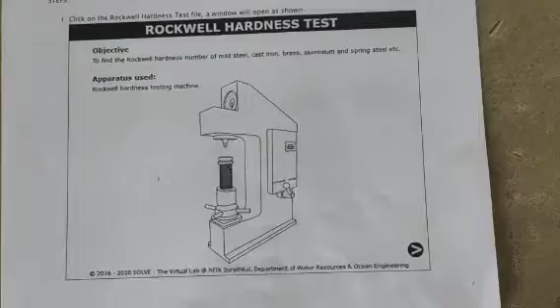Now I am going to start this experiment. This is a Rockwell hardness testing machine. This is called the anvil, and this is the dial gauge.

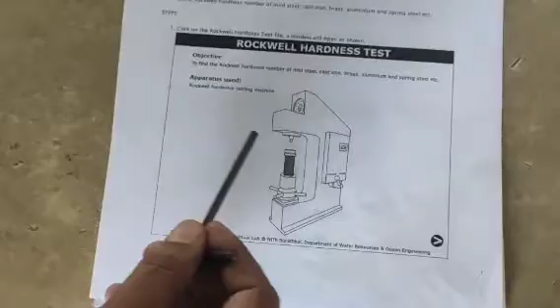In the dial gauge, there are different scales, A, B, and C scales are there. And this is the anvil table, and this is the indenter.

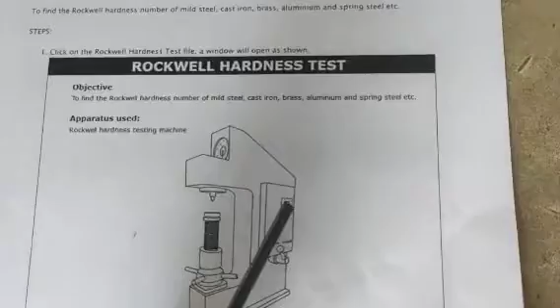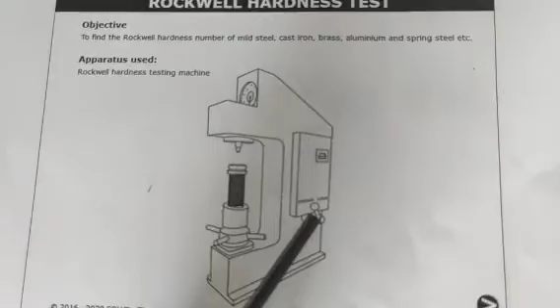In this particular portion, it indicates the load. This provision is only to fix the load, how much load is applied to the specimen. This is the lever, a manual lever available here, and this is the hand wheel.

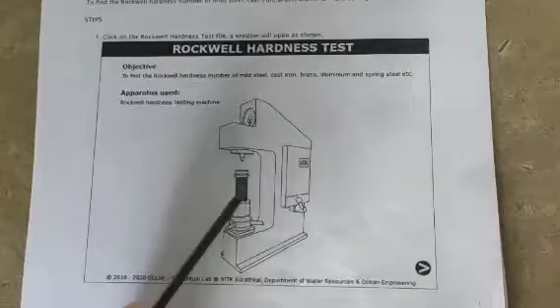Once your component rests on this anvil, you have to rotate this wheel. What will happen is this screw elevates up, and then makes contact with the indenter.

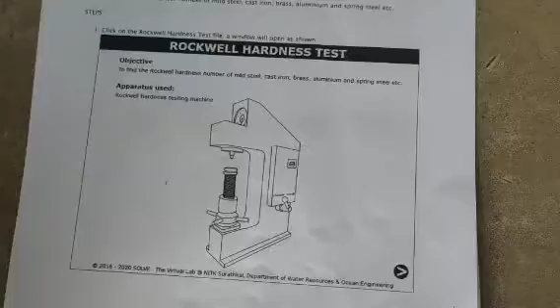As already told, there are two types of indenters: one is ball, the other is diamond indenter. So the main objective of this experiment is to find the Rockwell hardness number of a given specimen.

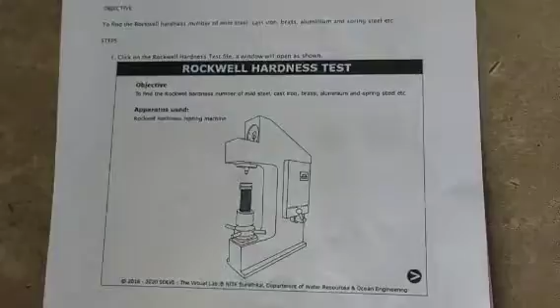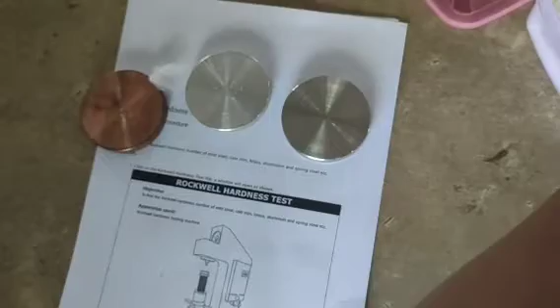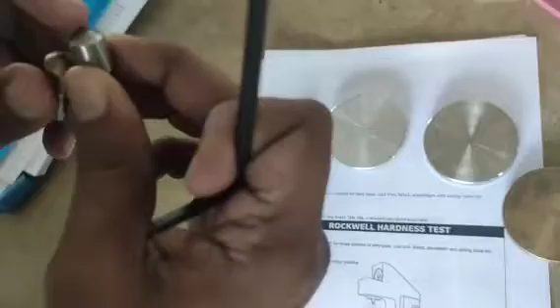There are two indenters here available: this is the cone indenter, and this one is the ball indenter. Already explained.

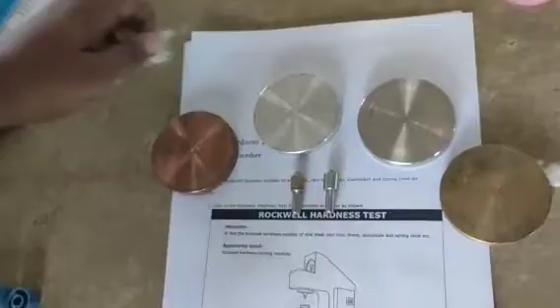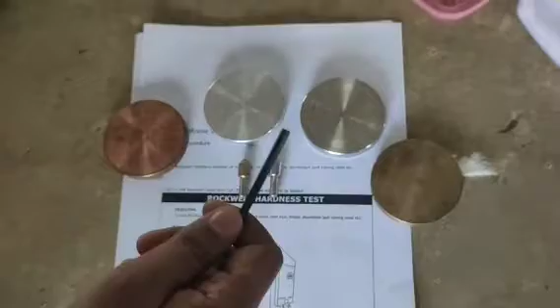Now I am going to check the hardness of this test specimen. Brass, bronze, aluminum, and steels are available here, different materials.

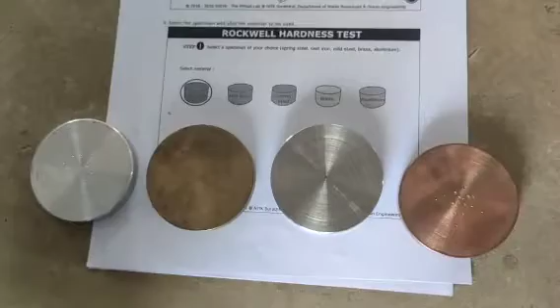The first step is I have to select the material of your choice. Now I am going to select this aluminum. I need to check what is the hardness of this particular specimen.

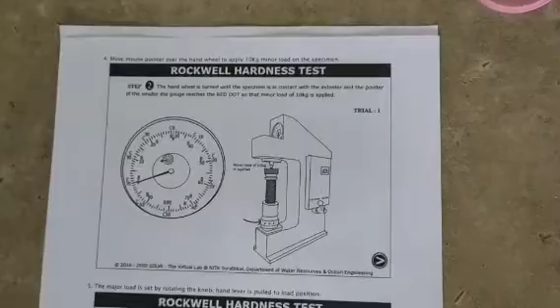The next step is the hand wheel is turned until the specimen is in contact with the indenter, and the pointer of the small dial gauge reaches the red dot, so that a minor load of 10 kg is applied.

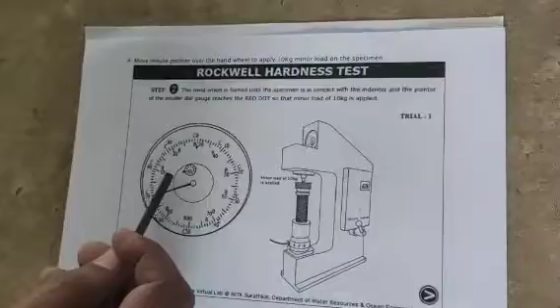Actually this is the dial gauge. Initially one small dial indicator is there, and this is one red point. The pointer should show at this red point, so that's why I have to fix the specimen on this anvil.

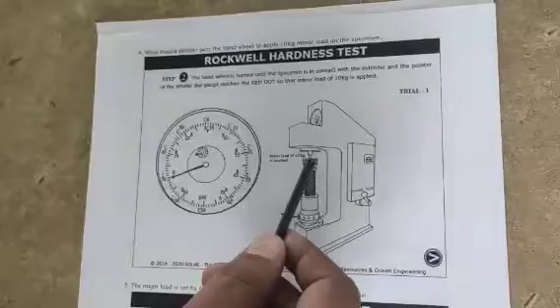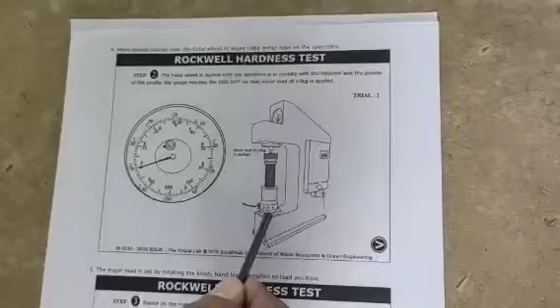Now I am going to select the 10 kg, then the minor load of 10 kg is applied. Now I am going to turn this wheel.

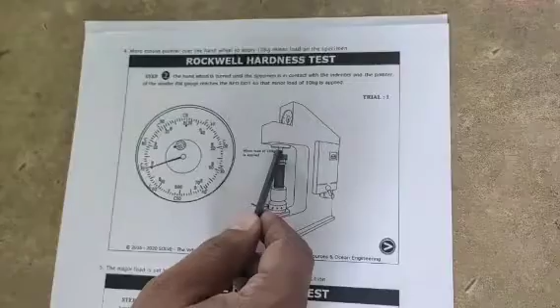What happens is this portion is simply lifted up. The specimen directly contacts this indenter, so a load of up to 10 kg is applied on this specimen. This is the initial condition.

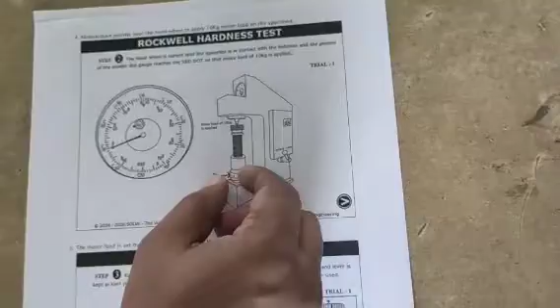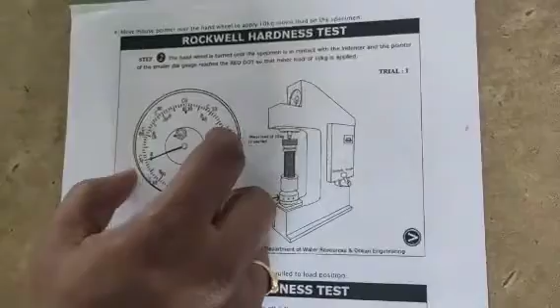So you gradually have to increase the height. What will happen is this pointer comes to show at the red dot. So that is the first step. Afterwards you have to adjust this dial gauge and fix it to zero. This is the lever.

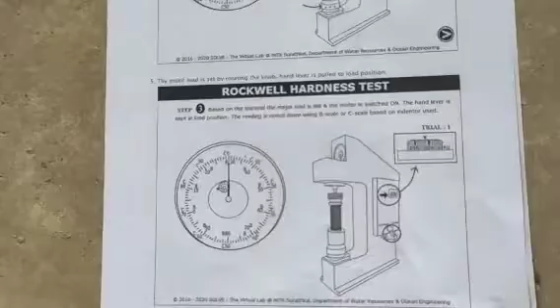The next, third step is based on the materials. The major load is set and the motor is switched on, but here only the manual Rockwell hardness tester is being used, so the hand wheel lever is used, this is called the hand wheel lever, in load position.

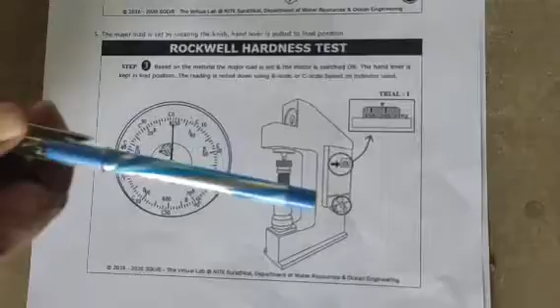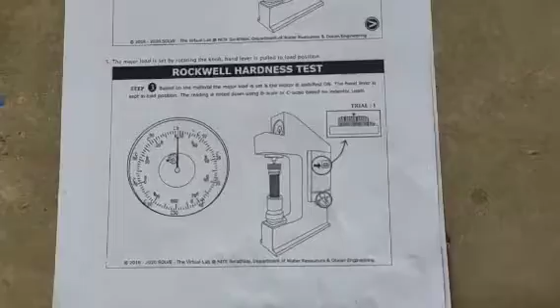The reading is noted down using the B scale or C scale based on the indenter used. Suppose you use a ball indenter or cone indenter, then the load should be changed accordingly.

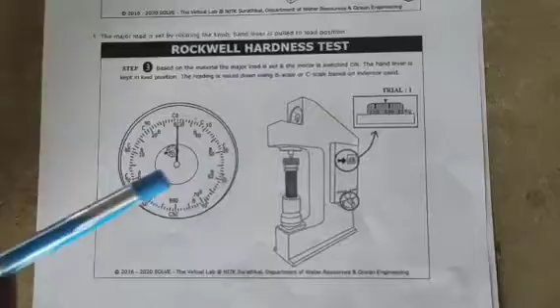So this is trial 1. Now we are going to fix the load here and adjust it. Now I am going to apply the load with the help of this hand wheel lever.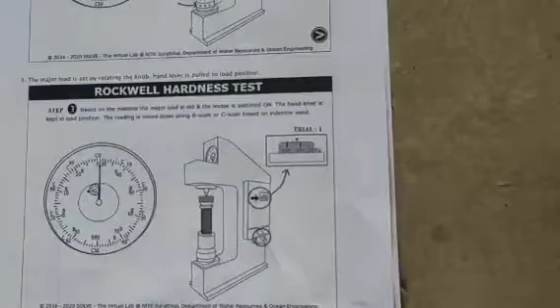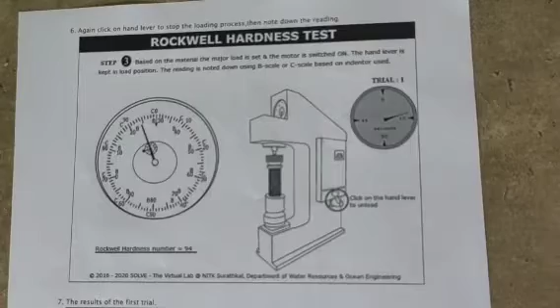Next step is based on the materials, the major load is set and the motor is switched on. Now here manually apply the load with the help of the lever. So the hand lever is kept in load position. The reading is noted down using the B scale or C scale based on the indenter used.

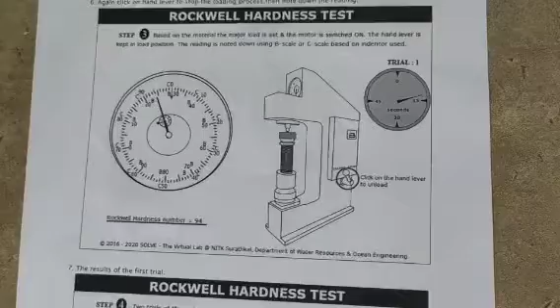How much time you are going to maintain it means a minimum of 30 seconds you maintain. The load is fully applied on this material, and the indentation will form on this specimen. Now we are going to note down the Rockwell hardness number.

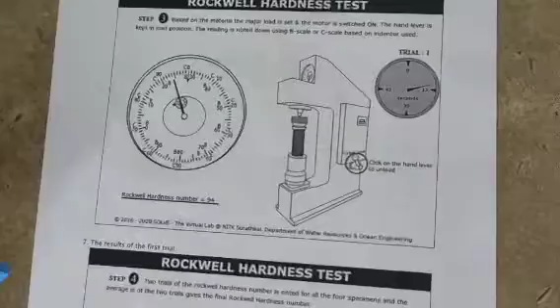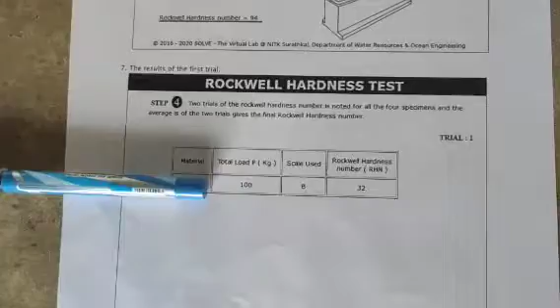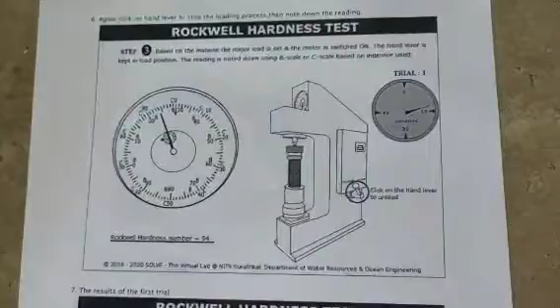The C scale here used 94 as the value. In this case, the trials of the Rockwell hardness number are noted for all 4 specimens, but I prefer to first discuss the aluminum only. Once you fix aluminum in this position, we note down the total load in kg, and the scale is a C scale reading you have to prefer, and you note down the Rockwell hardness number.

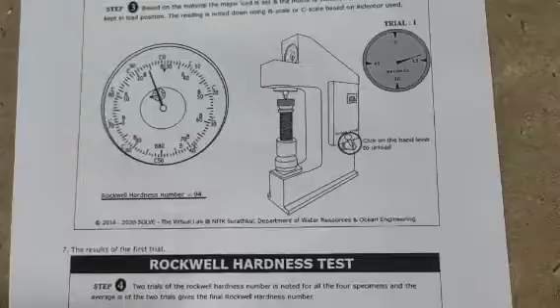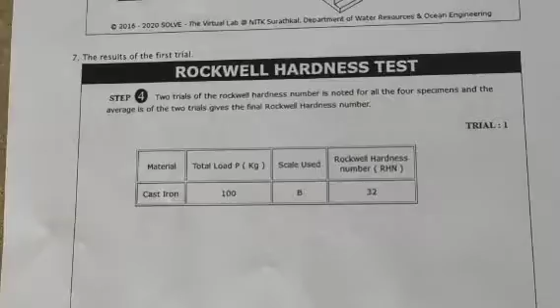Suppose you are going to use cast iron, the load used is 100, the scale used is B scale reading, and the Rockwell hardness number RHN is 32. But actually all the values or readings are directly observed from the machine only.

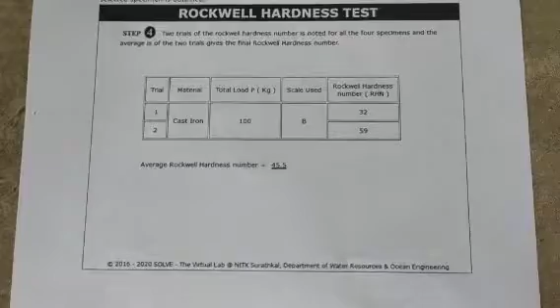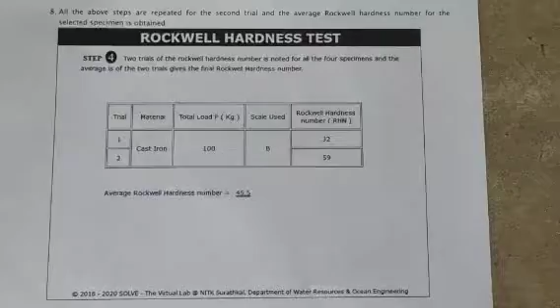The next step is that the trial of the Rockwell hardness number is noted for all 4 specimens, and the average of 2 trials gives the final Rockwell hardness number. For cast iron, you should take 2 trials, and then finally take the average. That is the final answer for the particular specimen hardness.

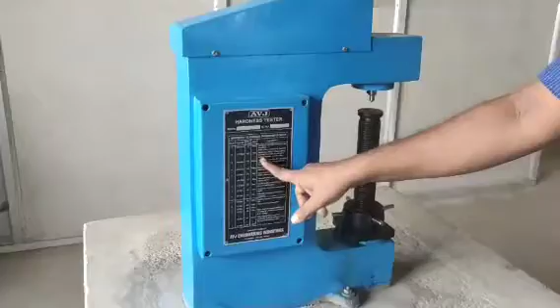So this is the Rockwell hardness testing machine. Just to see this, this is the hardness tester. How much? What are the different scales available?

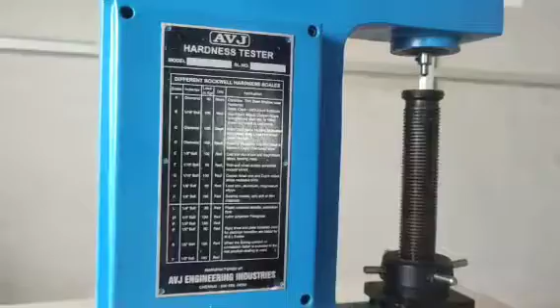In this, the first column indicates the scale, the second column indicates the indenter - what type of indenter is being used - and how much load is applied, and the third column indicates the dial.

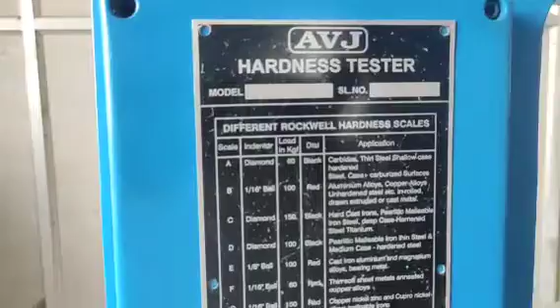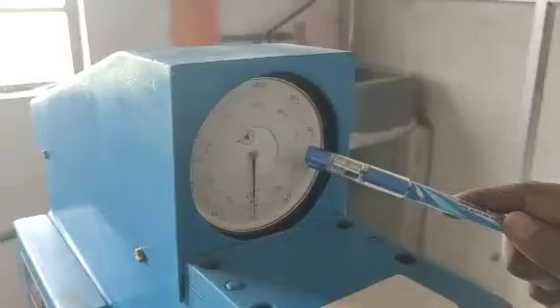The dial gauge comes here, so this is the dial gauge. In this dial gauge there are 2 different scales available. The first one is C scale and the second is B scale. B scale is shown in red color, and C scale is in black color.

This is called the anvil. In this anvil, your work specimen is simply kept over here. This is called the indenter. What type of indenter is being used here - a cone indenter. So with respect to the material, you have to select the appropriate indenter.

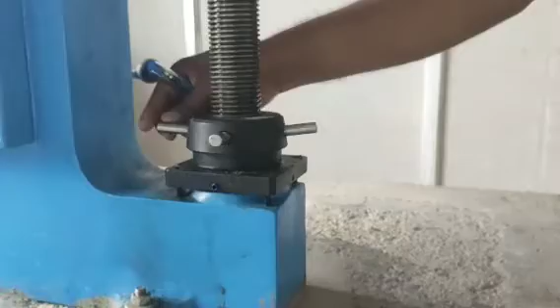This is the elevating screw. This elevating screw can move in the clockwise and anti-clockwise direction, which tends to make it move up or downward direction.

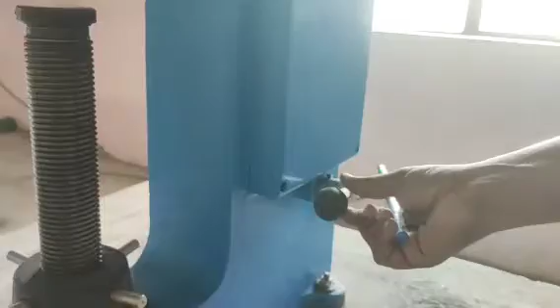This is called the hand lever. This lever only helps to apply the load on the specimen, and this is called the load fixture. So however much load you need, you have to fix and adjust it by rotating this wheel, and the machine is set.

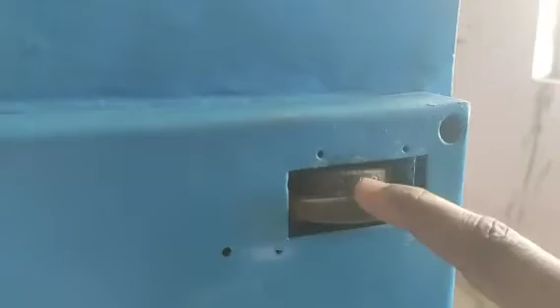Normally here it shows 150. This 150 load is definitely in kgf and should be applied on this machine, but I need only 100. Just I have to turn it, so it will come to 100.

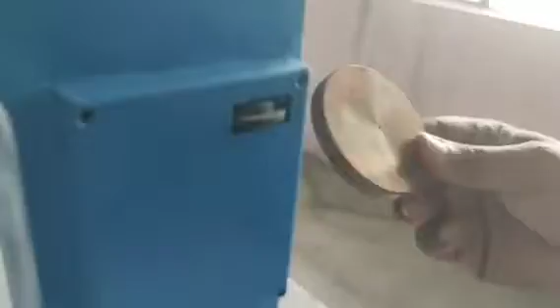Because I am going to use copper material, I need to find out the copper material hardness, so that's why I prefer this ball indenter.

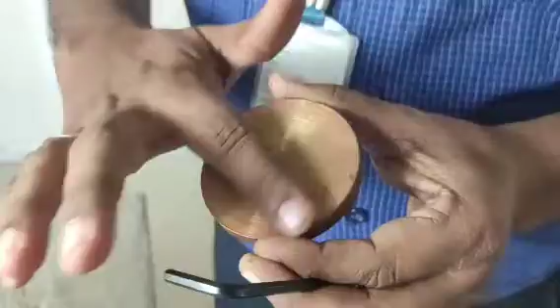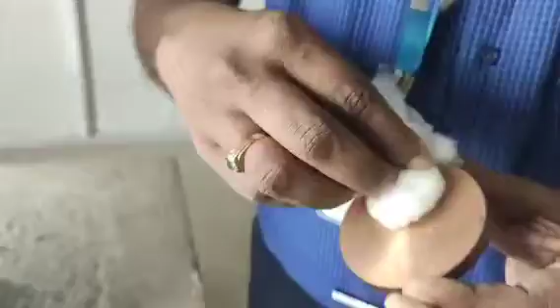Okay, so now I am going to fix this component. Before going to fix it, you should properly wipe it out - properly wipe out the unwanted dirt, you should remove from the specimen. Okay, like this, you have to remove all the dirt. Afterwards you have to fix it over there.

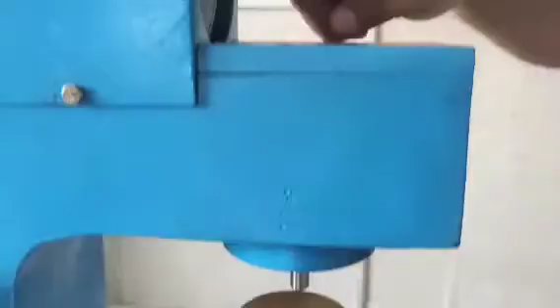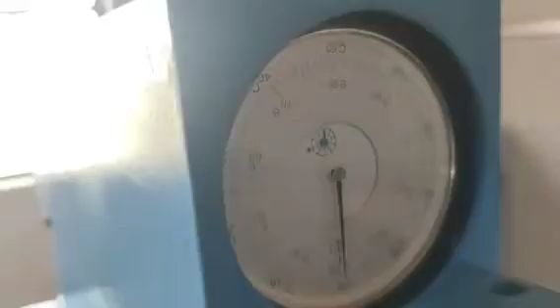Now see, this smaller pointer is not shown in red color, but initially the small pointer should come to this red color position. What I can do is rotate it in the clockwise direction, see, like this. Before applying the load, you should apply a minimum of 10 kg on this particular specimen.

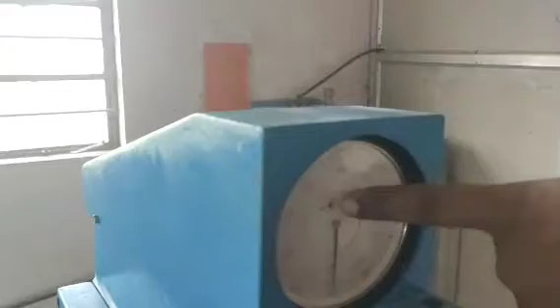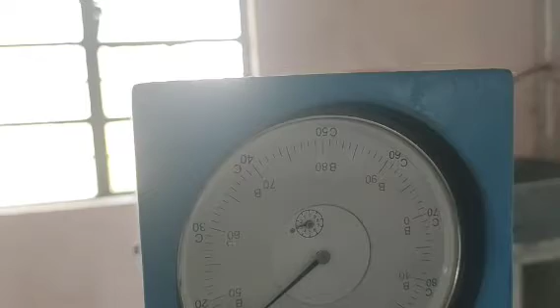Come here, see this pointer, now I am going to apply the load. So the small needle comes to red color. Okay, so that position is over. Now I am going to adjust this scale to 0.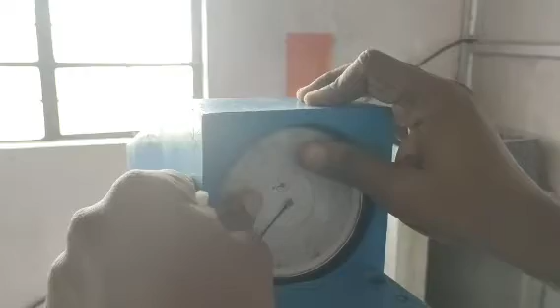So going to 0, now I am going to apply the load. I have to use this lever. I have to maintain 30 seconds, using a stopwatch or any measurement device, and maintain that 30 seconds.

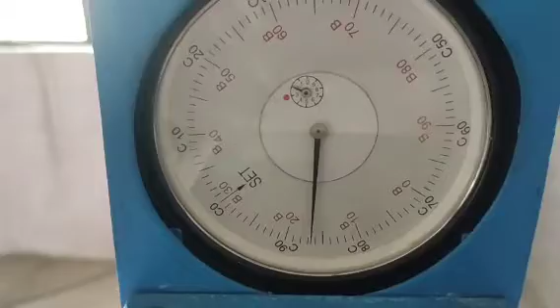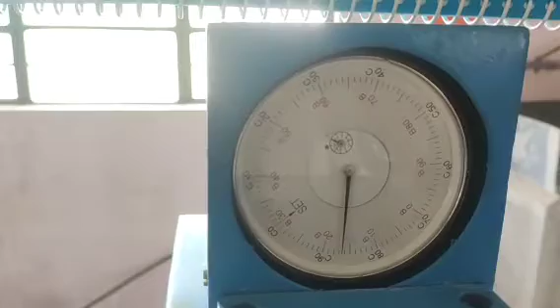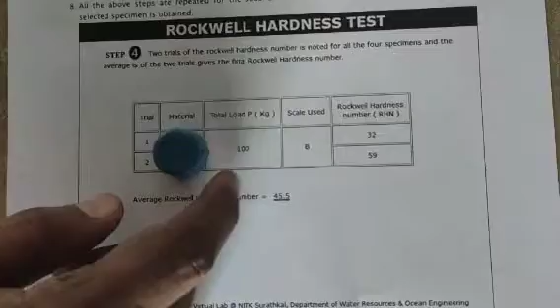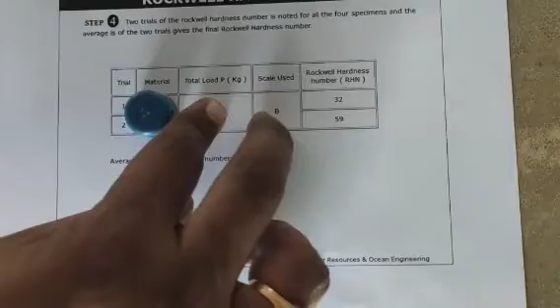For copper, B scale means cast iron, but here you are using copper, so that's why the copper scale reading is C, and you note down this value, C88. So this is trial number 1.

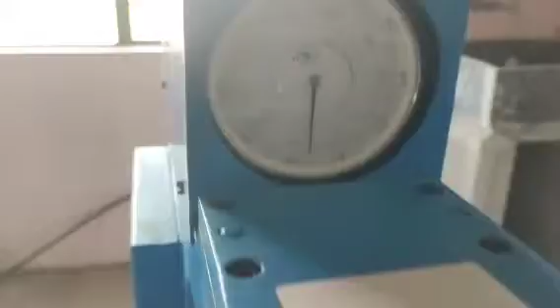Afterwards you have to release the load. You have to release the load, and simply move the elevator screw down and choose another area. Again repeat the same procedure, then gently touch the indenter.

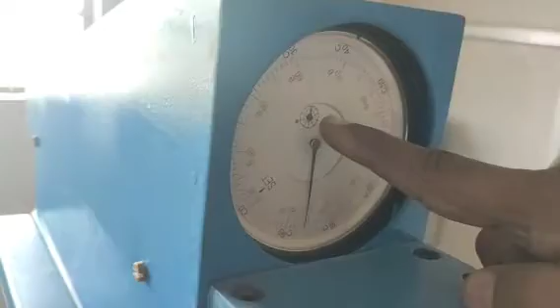Then here the small pointer is now shown at the red pointer, that's why I gradually apply the load - how much, 10 kg. Again I am going to fix it - already C0 is fixed at the null position.

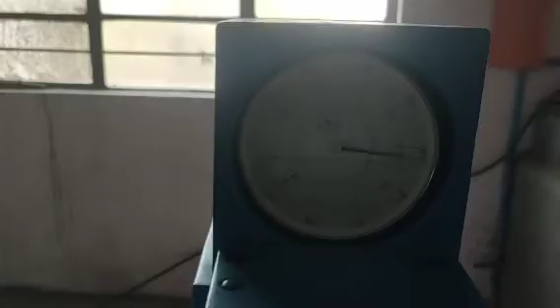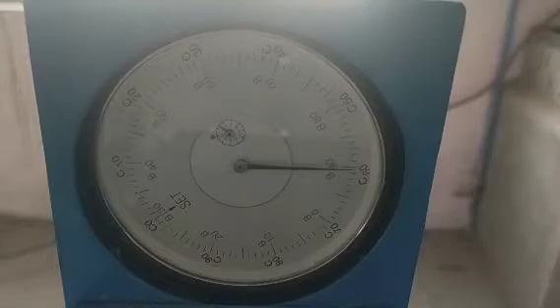Again for trial number 2, the load - now we are going to apply it. You have to maintain 30 seconds. Then I have to release the load.

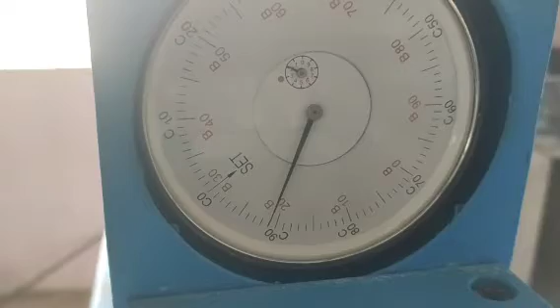So how much value is shown here? 92. So the first value is 88, the second value is C92. Afterwards you will take the average, and that is the final answer for the particular specimen hardness. Okay, thank you.